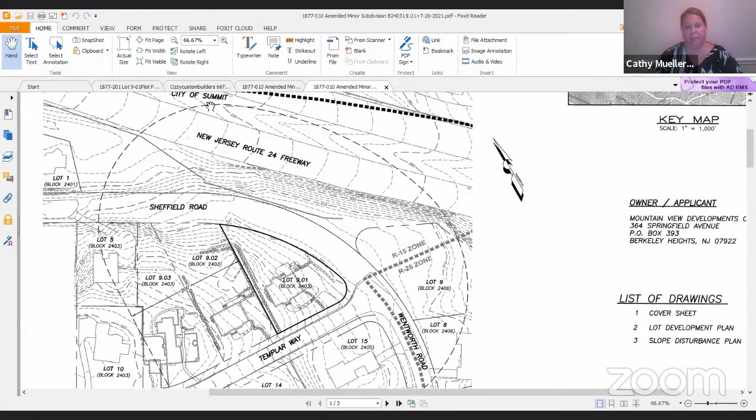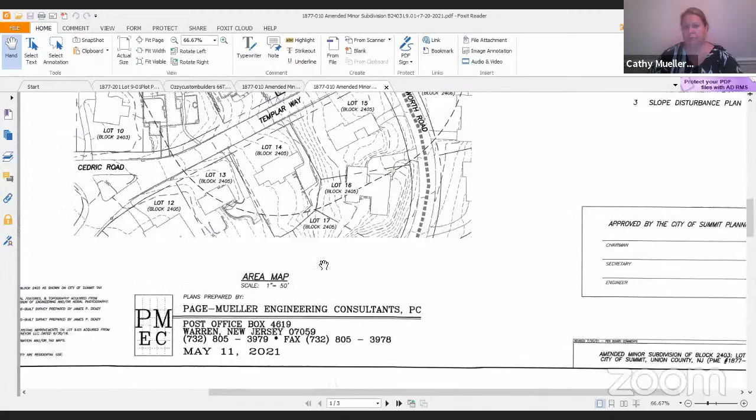Right now, Ms. Mueller, do you have plans that demonstrate the originally approved steep slope disturbance and the as-built steep slope disturbance? Yes, I do. I'll switch to sheet 3 of the plan. All right, please take the board through that.

So what I've shown here is a side-by-side comparison. On the left, these are pre-existing, pre-construction grades. The dark line outlined the proposed disturbance at that time. It was approximately 13,300 square feet.

And the percentages of slope disturbances are listed in this table in between, and I'll get to that in a second. On the right side of the screen, we have the as-built home, stairs, driveway, and now patio that I spoke about earlier.

On the left, this is what was approved by the board at the time. The front steps were relocated from Templar Way down to the new driveway. The home is identical to what was approved, and the deck was now converted to a patio.

So what we did on the plan to the right, we identified the slope disturbances to identify the variances under what was actually constructed on the site. We indicated the entire property as 100% disturbed, and we quantified those slope disturbances in the chart provided on the sheet.

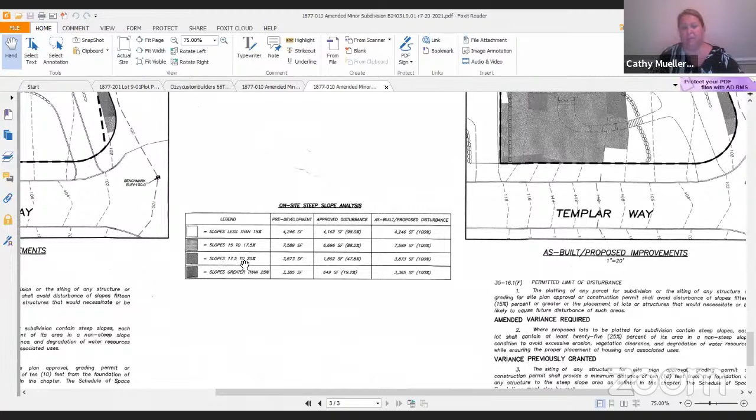And I can run through these quickly. The slopes were calculated for pre-development as we're going for an amended application. Less than 15% were 4,246 square feet. Slopes 15 to 17.5% or 7,589 square feet. 17.5 to 25% or 3,873 square feet. And slopes greater than 25%, which is the darkest gray, at 3,385 square feet.

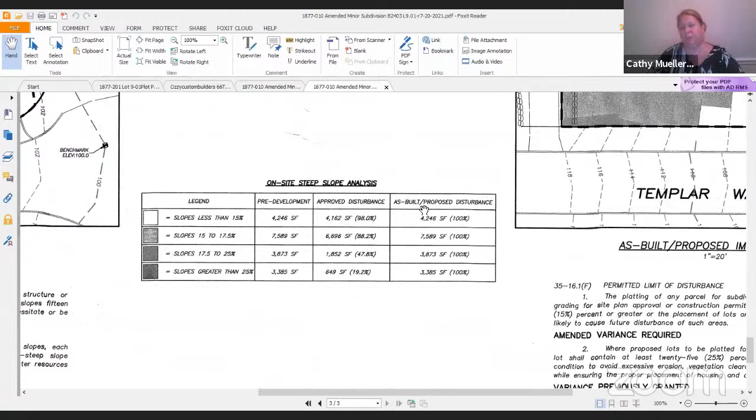Then we prepared a comparison of the proposed disturbance and the as-built proposed disturbance for which we're asking for relief tonight. Less than 15%, we're going to be 98% disturbed under the approved plan. That's now 100%. All of our proposed disturbances are calculated 100% because we did the limit of disturbance as the property lines.

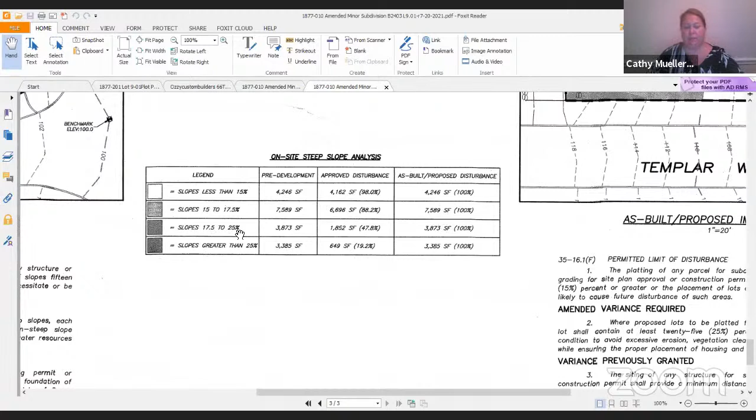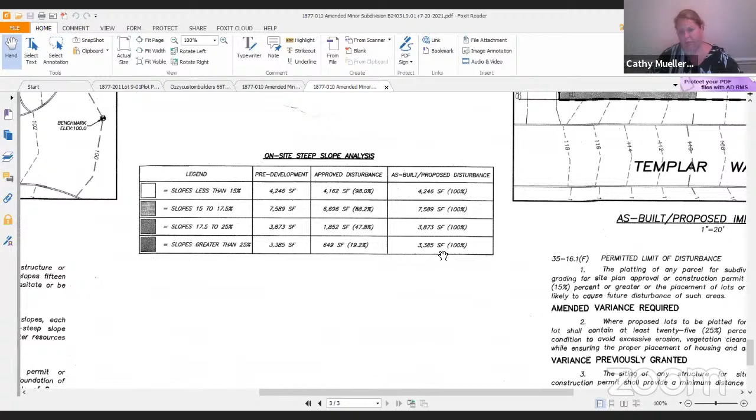The approved 15 to 17.5% was 88.2%, again for the whole lot it's now 100%. The slope 17.5 to 25%, we're at 47.8% of the 3,873 square feet, and now we're proposing 100% after the fact. Greater than 25% was the smallest category of the calculated slopes on site at 3,385 square feet. We had approved 649 square feet, and we're now, after the fact, 100% disturbance, 3,385 square feet.

We provided these quantitative numbers per the request of your board engineer and the planner. When we go through the slope variances that were already granted, one was that the house had to be greater, was within 10 feet of steep slopes - that variance stays the same. The other variance shall have at least 25% in a non-steep slope. As you can see from the numbers, it didn't comply. That variance has not changed.

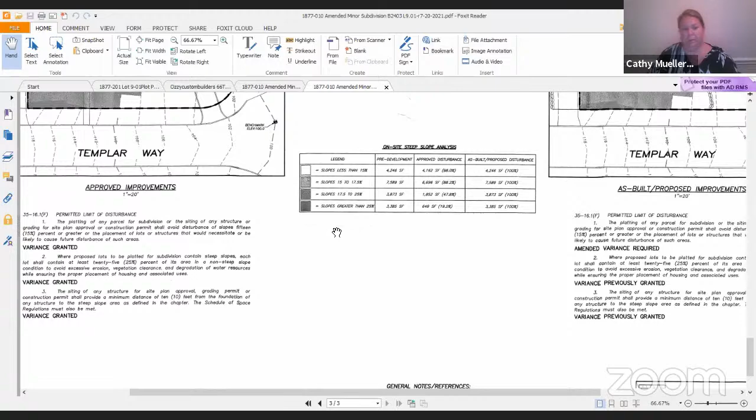And the last one is no disturbance of any slopes 15% or greater. That was granted, and now we're asking for an amended variance on that one because we are disturbing more land area, although it's not quantified as a percentage or area in the ordinance. But we are identifying the fact that this rear area of the property was disturbed - that is now their backyard. The slopes were pushed out on the lot and also pushed out into Sheffield Road to create a usable backyard.

Now, Ms. Mueller, are you able, as a civil engineer, to indicate for the board and members of the interested public what impact the additional as-built steep slope disturbance had on stormwater management, sedimentation control, and erosion control?

In my opinion, it had no negative impact. There were no issues during construction, again, that I'm aware of. The area has been stabilized with lawn. It was seeded and hayed when I was out on the site for the slope that was created. It was mostly a beneficial result for the use and the new homeowner of the property.

What is the natural drainage pattern in this area? It flows across lot 9.01 to the north, and continues towards Route 24, which is situated quite a bit lower than this lot.

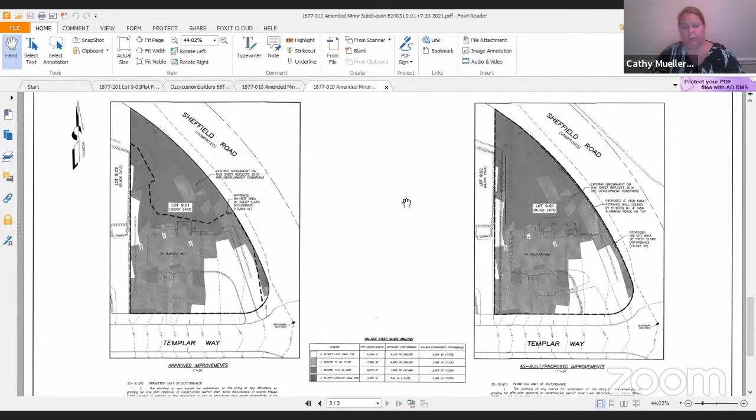And the administrative reviews, I'd like to turn to the administrative reviews. Before we get into the engineer's review, I want to ask whether or not in your conversations with the applicant, you are authorized to accept as a condition of any approval compliance with the forester's report.

Yes, the forester's report indicates a planting requirement, and I did look at that after we received the comments. The area I looked at was outside what they used for their backyard, and I delineated that along these arborvitaes. When I measured the limit of disturbance with the additional fill, it's approximately 7,250 square feet beyond those arborvitaes that we would need to plant. Doing the math of his requirement of 100 trees per acre, that would work out to 17 trees proposed to be planted in the Sheffield right-of-way, and we would comply with that recommendation.

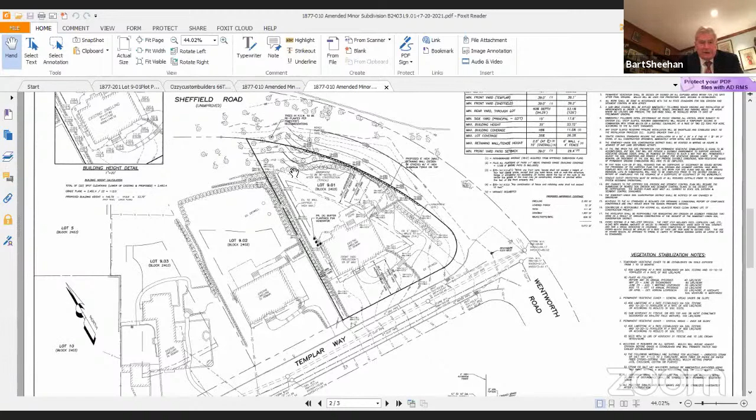And again, in connection with those plantings, given the grade change from the existing functional rear yard, would access have to be secured through the governing body, through the right-of-way of Sheffield Road, and permission to plant those trees in the event that there is an approval be given? Yes, that's correct. Whichever regrading all the reviewing agencies agree on, whether we take out all but two, whether it's no impact on what's there now, any access for construction and planting will all be within that right-of-way.

All right, now I would like to turn your attention to the civil engineer's report and begin with paragraph number 4, and ask you if you have a comment with regard to that note in his review. Regarding the fill that was placed in the encroachment into the city right of way, yes, that's a statement of fact. All right, I don't disagree with his statement.

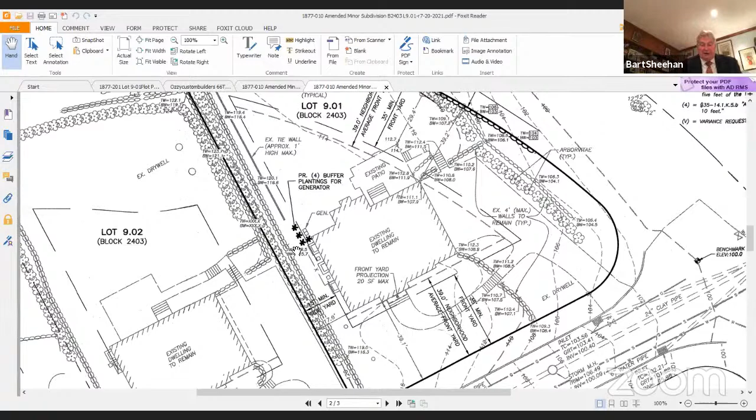Mr. Chairman, I conclude with a question for Ms. Mueller as to whether or not, in your opinion as a civil engineer, the proposed plan represented by this amendment to the originally approved development plan is superior in every respect.

The main goal of this plan with the 6-foot wall proposed was to remove fill from the Sheffield right-of-way. I do not see any detriment to leaving the fill in the right-of-way. We understand it was not compliant with the approved plans, and we will grade it out as proposed, however the board and their professionals see fit.

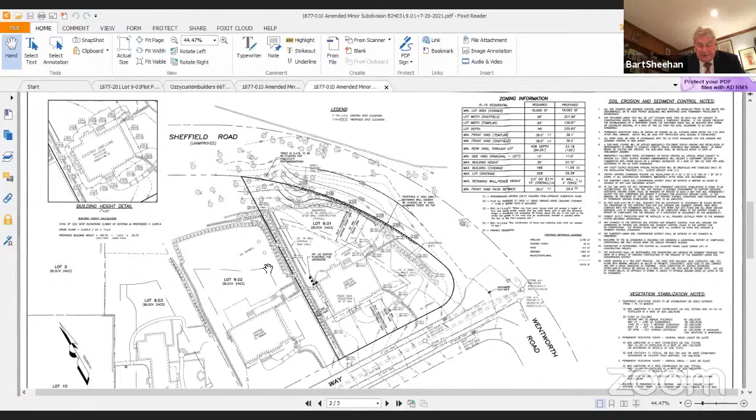I have no further questions of this witness, Mr. Chairman, and would submit her to the examination of the board and members of the interested public. Thank you, Counselor. Any members of the board have questions of this witness? Let's have questions from the board members first, then we'll see if there are any from the public.

If I could, the picture you just had up, the drawing, that's what you're proposing, correct? That's correct. And currently on the site, the stone wall facing Sheffield starts, then there's a brief stop, then it starts again. Is that true about the existing condition of the site at the moment?

The existing wall parallels the driveway. It extends slightly towards Sheffield and stops at the right-of-way, and it also makes a left to form the stairs that go up to the raised patio. Okay, but is the wall continuous, or is there a break in that wall facing Sheffield? There's a break in the wall.

When there was an inspection done—again, I don't remember the date—it identified some walls above 4 feet in height, which we've corrected. The as-built also indicated a portion of that wall out into the Sheffield right-of-way, and that was removed by the applicant per that inspection.

This may be a question for another witness, but it sounded in your testimony that there was soil that existed on lot 9.02, and once that was completed, that soil was moved to lot 9.01. Is that what you testified to? That's my understanding. There was no imported soil—it was generated by the basements and the construction of the 2 homes.

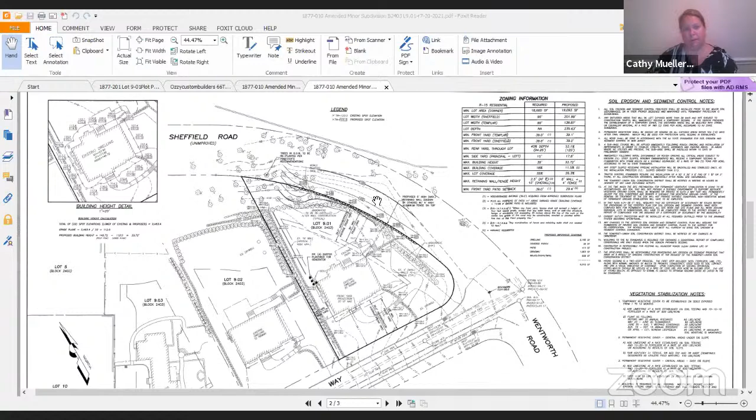Sure. Let me just share my screen again here. So this is sheet 2 of 3 that we were looking at before. Let me just zoom in here. Exhibit A1.

I'll start from the southern end and work up towards the point. We have a 1 foot wall indicated, a 3 foot wall, a 6 foot wall, 6 foot wall, 6 foot wall, 5 foot wall. So it's between these 3 spot shots, about 20 feet, more like 40 to 50 feet.

I apologize, I have a small plan here in front of me at home. So it would just be between these 3 spot shots, top of wall 109, bottom 103, top of wall 109, bottom 103. That would be the 6 feet in height, and then it would step down as we go to the north and south.

And there would be arborvitae or green giants planted in front of that, correct? The intention was, if the board does approve the application, we'll do a full submission of a lot grading plan. There's an established row of arborvitaes that defines their backyard that I'm following with my plan. The intention would be to remove those during temporary construction and then reestablish those arborvitaes at the top of the wall, and the plantings in the right-of-way would be per the forester's recommendation.

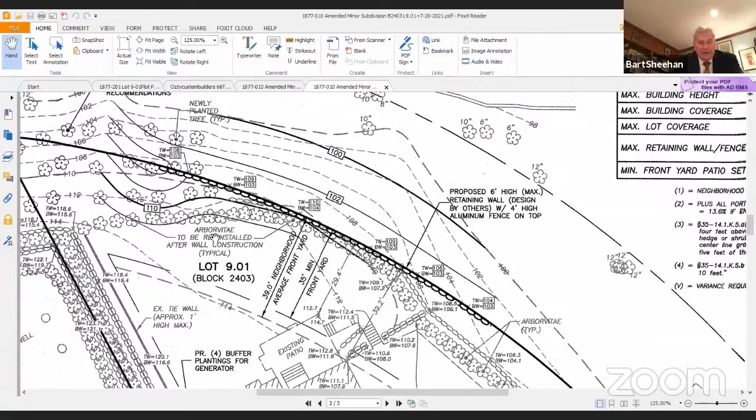Now, does that address, excuse me, Ms. Mueller, if you did that and created the 8.5-foot wall for that 20-foot stretch, plus or minus, you would be able to remove all of the fill from the right-of-way of Sheffield Road, correct? That's correct.

Right, and Mr. Chairman, in my introductory remarks, it was my intention to preserve the flexibility of the board in deliberations by saying, if you decide to remove all of the fill in Sheffield Road, the applicant can do that and would consent to it, but would require a slightly higher variance for the wall. I don't think that variance would have any impact on anyone, given its location.

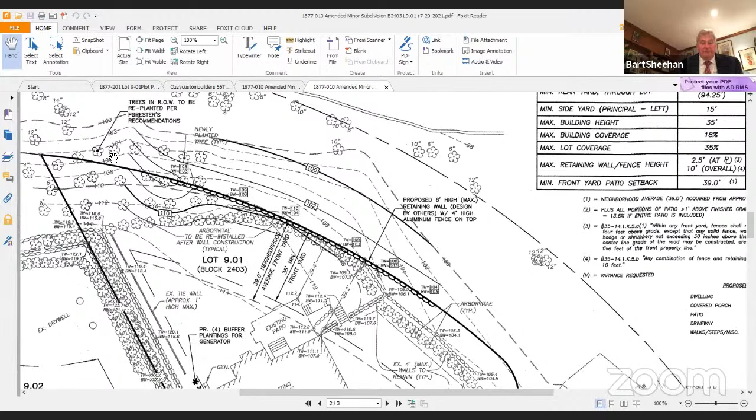If, on the other hand, the board felt that the better plan was to leave either some or all of the fill in Sheffield, the applicant would be willing to make that request of council, but it would unduly extend these proceedings. And in my opinion, subject to Mr. Warner's greater experience and wisdom...

It would seem to me that it would be better to carry the application and wait for council, rather than create it as a condition of approval, which might require the necessity of coming back. If council rejected it, then the plan would be to remove it, create the 8.5-foot wall. If council approved it, then the board would be given the opportunity of incorporating council's judgment in its deliberations as to how to address the amended site plan request.

If, on the other hand, the board says no, we think that it is in the interest of the public good to have all of the fill removed, that's something that the applicant is willing to acknowledge.

Chairman, okay, Anderson, may I ask a follow-up question? Sure. You were testifying on Mr. Sheehan's question regarding what the wall would look like if all the fill was removed, and it would reach 8 feet in a certain area, correct? 8.5, yeah. Okay, can you show us what the wall was originally intended to be in its approved conditions on its first approval?

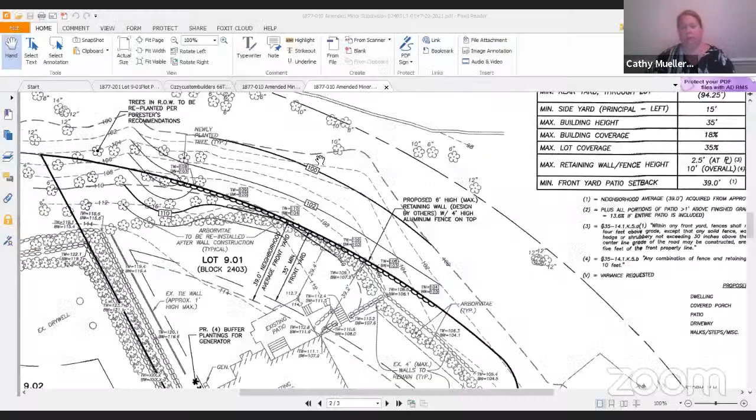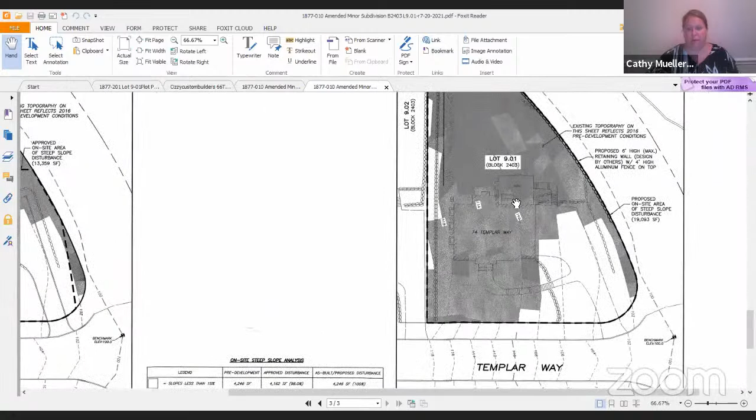This is the left exhibit on sheet 3, which shows a 4-foot wall adjacent to the driveway. That 4-foot wall was still constructed in the similar location adjacent to the driveway, and an additional wall was added to the east-west, and then this slopes up along the steps to the rear yard.

So it's the additional wall that is now being proposed at 8.5 feet? No - tonight's proposal to remove the fill is basically going to cut out the triangle of fill within the right-of-way and maintain the grades the best we can along the right-of-way with the wall.

I understand, but you mentioned a 4-foot wall, and then you also referenced a second wall, correct? So to answer the question of what was approved, that's the plan on the left. So there was no secondary wall that Mr. Sheehan is referring to that now has to reach 8.5 feet in order to address the fill issue, correct?

Well, it's two parts. One, there was a 4-foot wall here that was going to wrap around - it's a garage under the house - and it would slope up naturally behind.

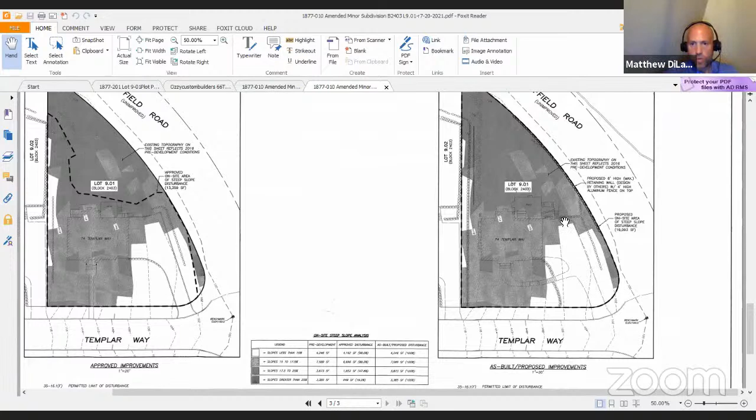Under construction, and this is the existing conditions - this gray wall here was constructed. And this turn on the wall was also just extended and blended into the steps that go up. Those are constructed walls - if you go out there today, you'll see those. They blend into the hardscape for the steps up to the patio.

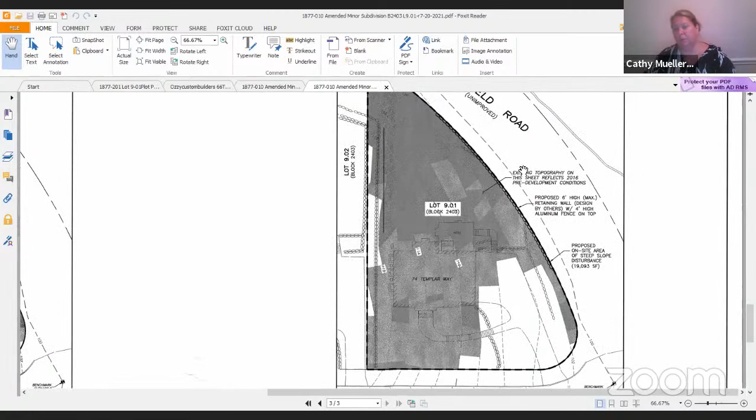There's a darker wall here, a little hard to see along the right of way with the slopes. This darker wall is our proposed solution to remove fill in Sheffield Road, because of decisions made during construction. The applicant can discuss the field conditions when he's up next. Thank you, sure.

So any other questions from the board members? Mr. Chairman, I have a couple if no other board members or board professionals have. Mr. Warner, please go. I didn't see that we had any questions from the public. Thank you, Mr. Warner, thank you, sir.

Thank you, Mr. Chairman. Ms. Mueller, if we can go to your sheet 3 of 3, the slope disturbance plan. Do you want me to share it up on the screen? If you don't mind, real quick. Sure.

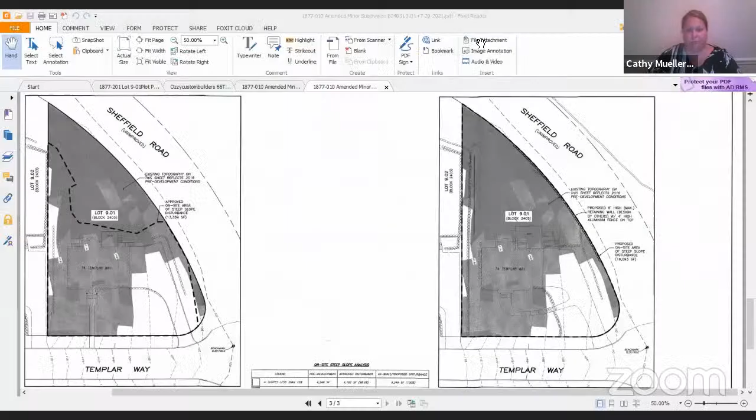And here we go, we had the calculations there. If you can enlarge the calculations a bit - am I correct that the as-built disturbance is approximately 6,000 square feet more than the approved disturbance, a steep slope disturbance, or I should say slope disturbance? It includes less than 15% as well, but the vast majority of the additional slope disturbance is in the steep slope categories, correct?

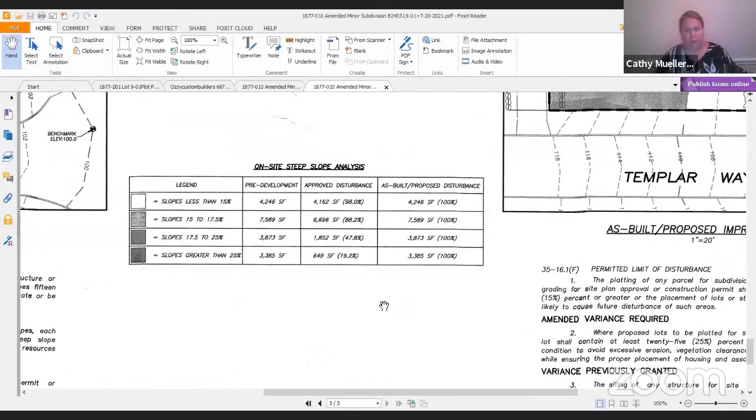That's correct. The additional limit of disturbance approved was 13,359, and proposed, the whole lot area of 19,093. So that works out to be 5,734 - just shy of 6,000 square feet more, and almost a 50% increase in the slope disturbance from what was approved, correct? Correct. Again, I was looking at the limit of disturbance, which the majority of the lot is steep slopes, so we simplified it to just the limit of disturbance and then broke it down into the slope categories.

And while this is not a question for you, we did skip item number 13 in the engineer's June 23 report, recognizing that the settlement agreement with the objectors in the prior proceeding was a part of the approval, and also included, if I recall correctly, the attachment and incorporation by reference of the settlement agreement with the prior objectors. I guess just a couple of quick points for the benefit of the board: one, we don't get involved in private party issues, but when we are considering an approval, like with the prior approval the board considered, members of the public weighed in at that time. They've been noticed, they may weigh in this evening, but in some way, shape, or form, Mr.

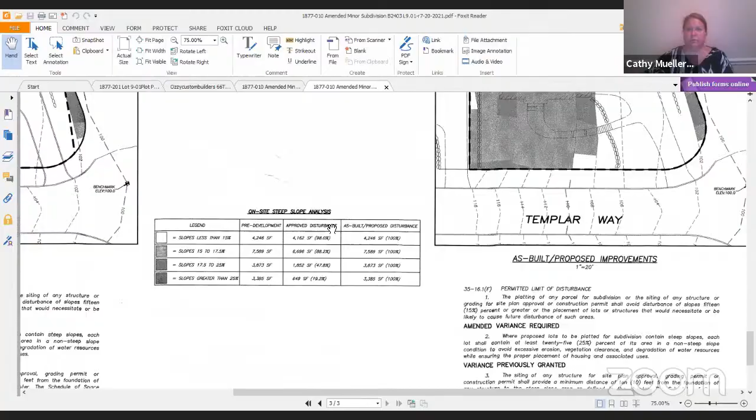You know, Mr. Warner, I agree with you that the original resolution incorporated as an exhibit, not by reference but as an exhibit, the agreement entered into among the objecting neighbors and the developer. And the developer will testify that to date, there have been no complaints either during construction nor, at least to my knowledge, as a result of this pending application.

In fact, I believe that Ms. Mueller may have had conversations with one of the adjoining neighbors who was a member of that objecting consortium, who commented on the existing development. Cathy, can you make that comment available to the board?

So we're working on a site plan for an adjacent neighbor that we had worked on in the past. We put in a patio and we're doing some more stuff for them. When I spoke to her, she didn't express any discontent for the development or any concerns or drainage concerns, because we did a full topo on her lot. They're actually at the end of Wentworth, at the end of Templar.

Yeah, I can state, Mr. Warner, that I read the settlement agreement carefully, and I do not believe that there have been any violations of that agreement by the developer. And that's fine and good.